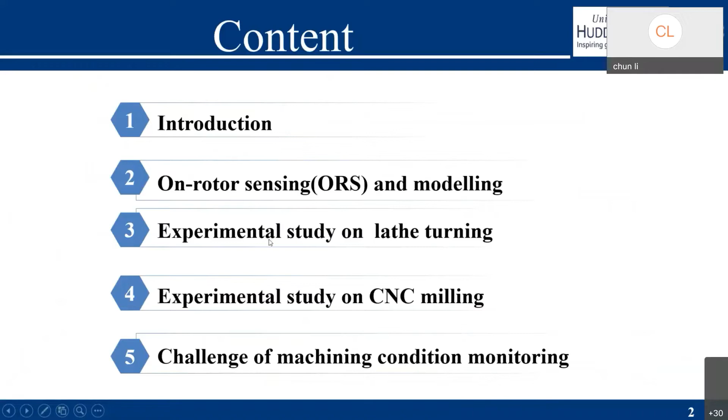Please. Okay, thank you. I'm Chun Li. I'm from China. Today, my topic is about machining condition monitoring based on vibration data from on-rotor sensing. I will introduce my content in 5 parts. Firstly is the introduction. As we know, machining is very important in our manufacturing, and it's reported 70 to 80% of the parts are formed by cutting, such as turning, face cutting, drilling, milling, and so on.

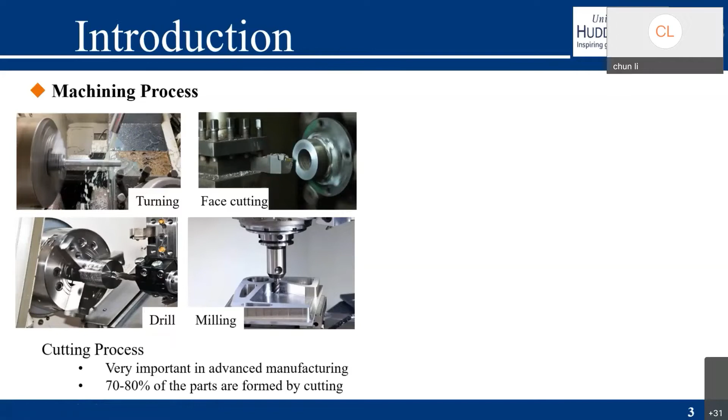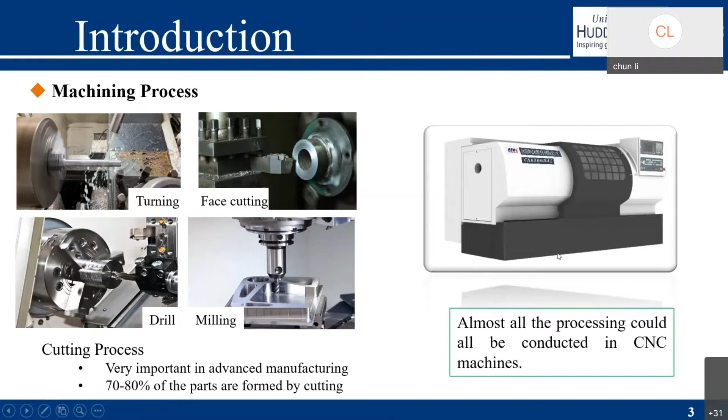With the development of technology, there are more intelligent machines such as CNCs, and almost all the processing could be conducted in the intelligent machines. But condition monitoring is very difficult due to 3 factors: a very complex machining process, various impacting factors, and it's very difficult to install the sensors. This figure shows the geometric errors in the products, and these figures show the changes on the surface of the products. And this shows tool wear or tool breakage. So it's very important to do condition monitoring during the machining process.

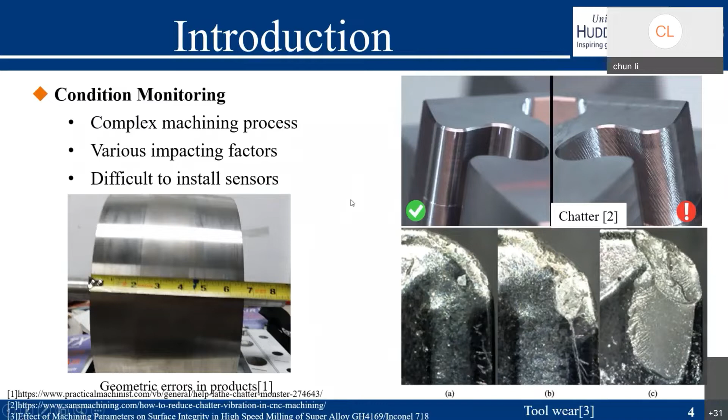As for the machining condition monitoring methods and sensors, it is reported that there are many different methods. The main method is the stability analytic method, and the second is signal-based monitoring. The stability analytic method is mainly about research on the parameter side. When we do the machining process or cutting, we just need to check the stability parameters and work in the stable parts. But even though we use the stability parameters, some uncertainties such as temperature or tool wear will happen, so it will produce unpredictable results.

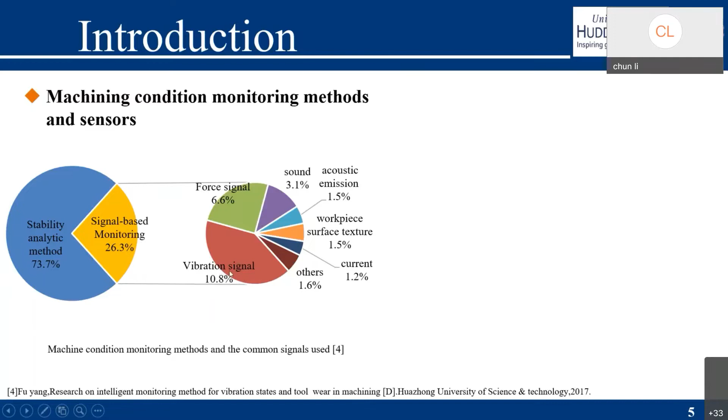In this view, we can see that signal-based monitoring is also very important. So for this report, we just focus on signal-based monitoring. As for this method, we can see that vibration signals occupy the main part, more than 10%. So for my report, I focus on vibration signals. When we need to obtain vibration signals, we need the accelerometer sensor.

And we can see that these sensors need wires to transmit signals or to obtain the power supply. Due to the wires of the sensor, they have to be fixed on the stable parts or some tool holder. But when we need to monitor the quality of the workpiece, these vibration signals are indirect. So we just think maybe we can fix our sensor on the workpiece, but

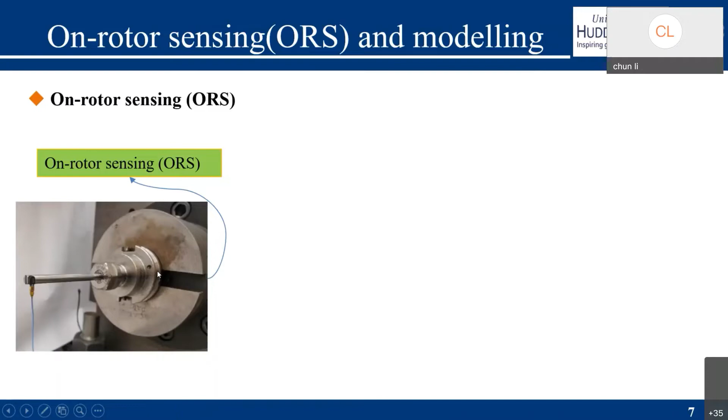Hello. Hello, I think she is offline. Yeah. Dropped the line. Yeah. Just waiting for a second. Can you hear us, Li? Just waiting for a moment. She is reconnecting. Yeah. No issue.

So what's the time now in China right now in Li's place? China. Hello, can you hear me? Hello. Yeah. You can start. Okay, sorry. You can continue. You can once again share your slide. Okay. Can I see my screen? Don't worry. It happens like that. Please go ahead. Yes, it's the poor Wi-Fi.

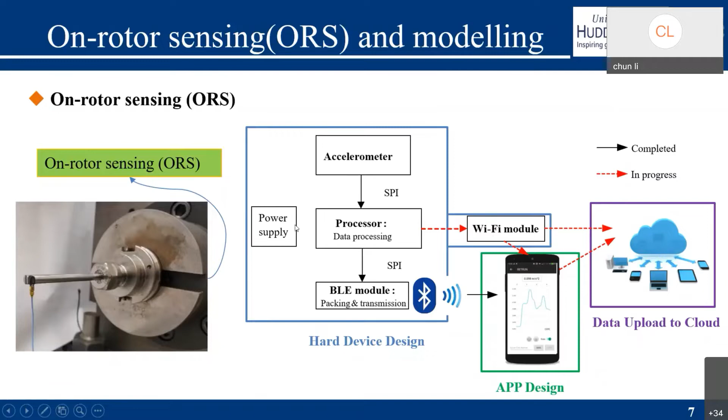So the colleagues in our research center developed the on-rotor sensing, we call it ORS, to obtain the vibration signals. For this ORS, we designed the hard device and the intelligent app. The hard device includes accelerometer, processor, the Bluetooth or Wi-Fi module, and also the power supply. This figure shows the parts of the ORS.

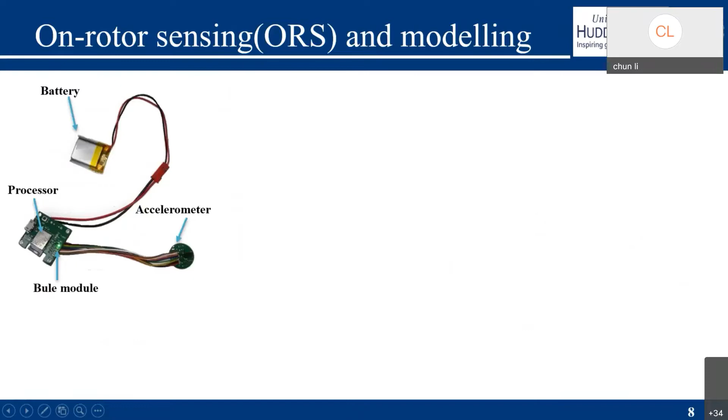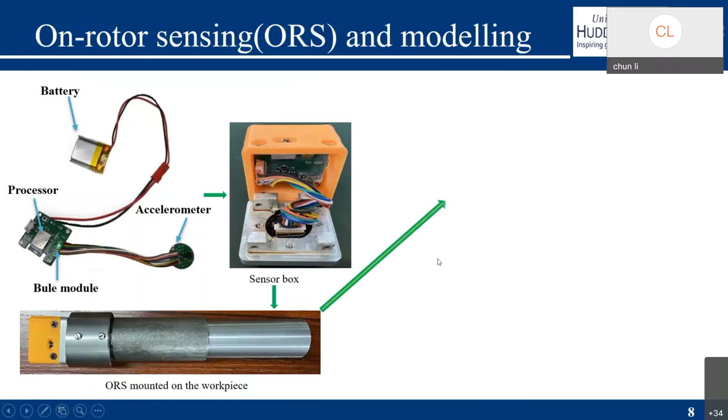When doing the turning experiment, we put these parts in the sensor box and mount it on the end of the workpiece. Then when we do the experiments, we use the ORS to get the vibration signals. This is our first version of the sensor box; the frequency range is 1600 Hertz, and the dynamic range is 16 G.

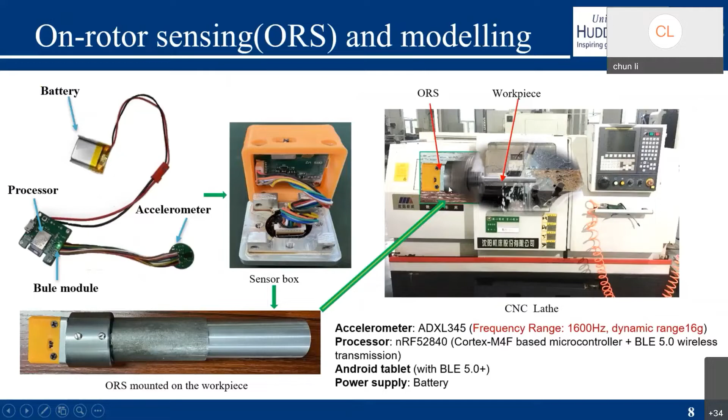When we do the experiments, we find that the dynamic characteristics of the spindle rotor have a big impact on the vibration signals. So firstly, we established the finite element model of the spindle rotor. This is our model. The spindle rotor is mainly supported by two sets of bearings, the rear bearings and the front bearings. I simplify the rear bearings as radial spring support, and the front bearings using radial and axial spring support.

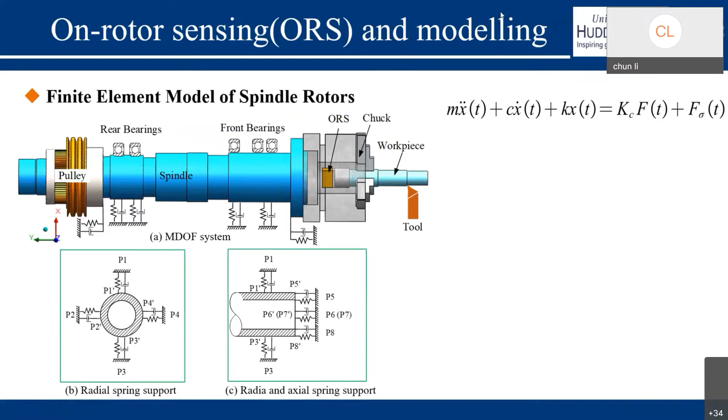Then we can write the simple equation like this one, and F is the periodical total cutting force. Kc is the coefficient related to the workpiece material, heat treatment, cutting angles, and depth of cut. And F sigma is the stochastic cutting force, which can be written like this. The big Gamma represents the Gaussian distributed white noise, and delta, mu, and sigma are mathematical parameters specific to the parameter set; delta is related to the cutting velocity, mu is the chip width, sigma is the rake angle.

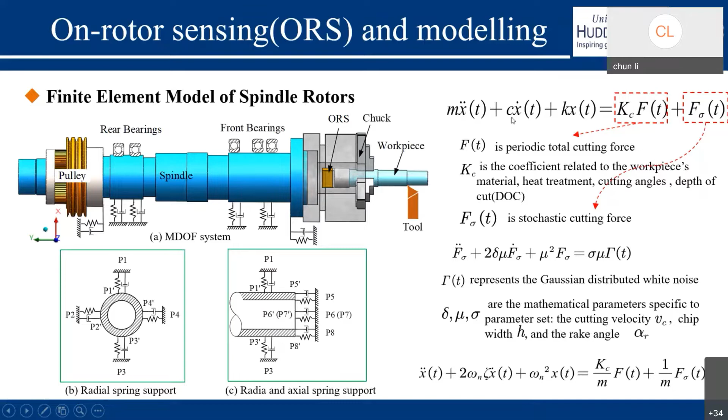So we rewrite the equation like this one, and we can see that this part is related to the tool wear conditions and depth of cut. In this part, we can see that the stochastic cutting force can induce resonance. And this is the mass of the system. So we take these three factors into consideration. Firstly, the mass of the workpiece. We set 4 different masses, mass 1 to mass 4, with increasing mass, and they have different diameters and lengths.

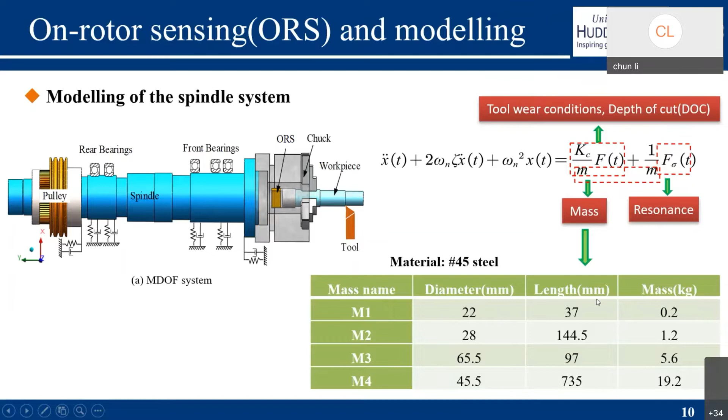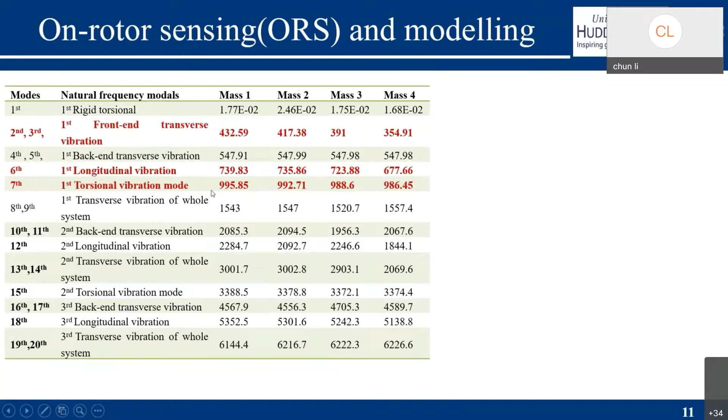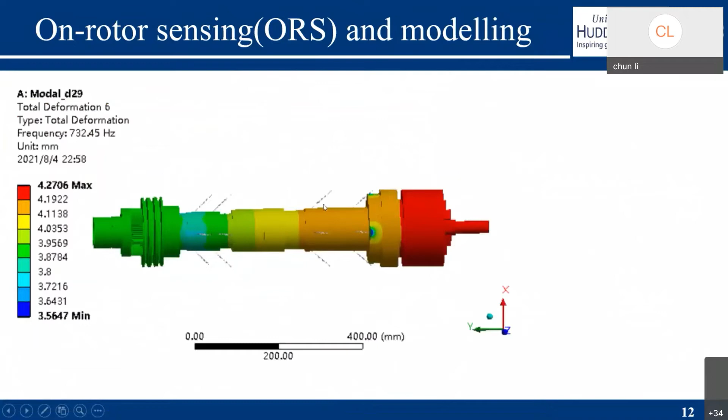We firstly use the FEM model to obtain the natural frequencies and different modes. Because of the frequency band of the ORS, we just focus on frequencies below 1,000. This is mode 3, the front end transverse vibration, and the mass of the workpiece has a big influence on this natural frequency. This is the back end, the belt end of the spindle, the 4th or 5th back end transverse vibration; the mass of the workpiece has little influence on it. The 6th is the longitudinal vibration, and the 7th is the torsional vibration mode.

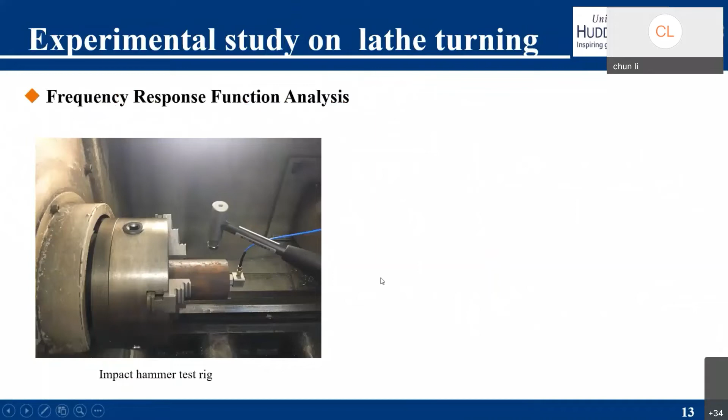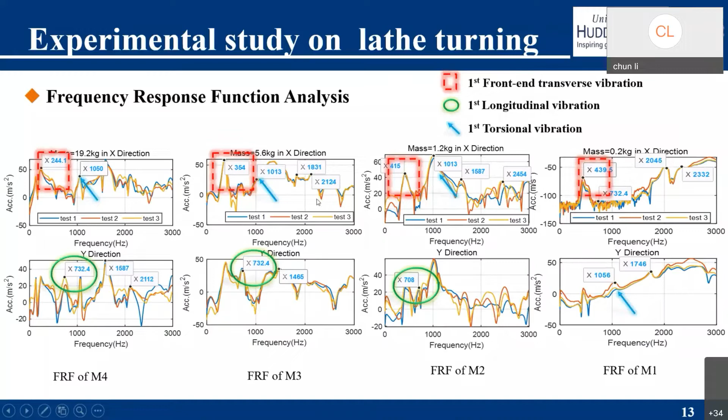To verify the FEM results, we did the impact hammer test and got the FRF results. We can see that even though they have different masses, we can obtain their front end transverse vibration, and it increases with the decrease of the mass of the workpiece. Also, the longitudinal vibration is about 700 Hertz, and the torsional vibration is about 1,000 Hertz.

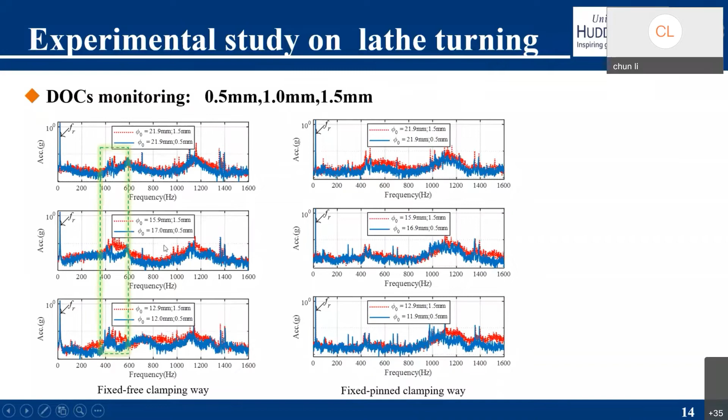Based on this analysis, in the experiment we set different DOC: 0.5, 1.0, and 1.5. We also have two clamping ways, the fixed free clamping and the fixed pinned clamping. For both, we can see two resonance frequency bands, consistent with the impact test and the FEM results. Also from this figure, we can see that the greater the DOC, such as the red representing DOC 1.5, and the blue one representing 0.5.

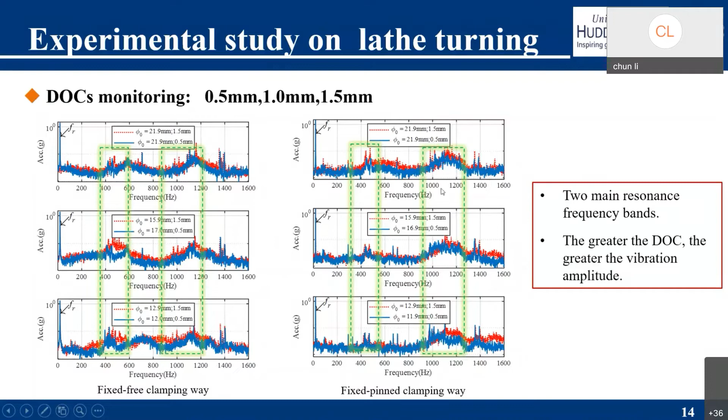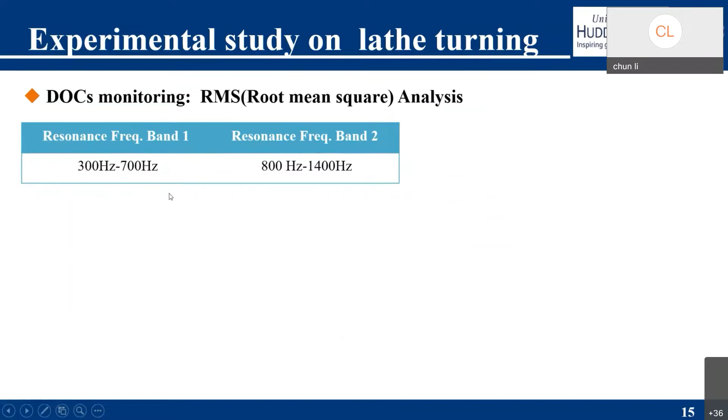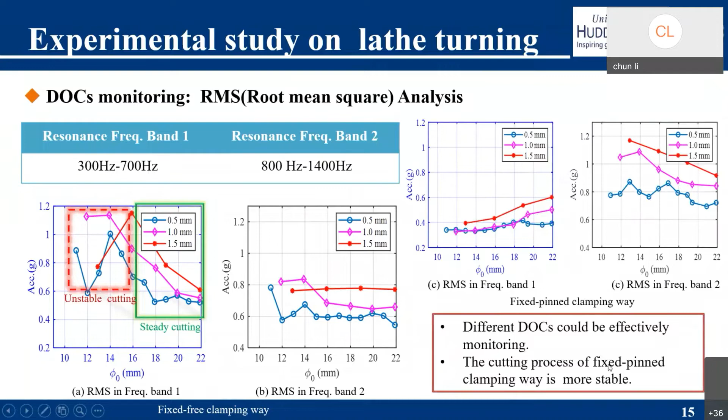So later on, we just use the two different frequency band filters to get the filtered data, and we just calculate the RMS after the two band filters and get the result. We can see that the different DOC can be effectively separated, and also the fixed pinned clamping way is more stable.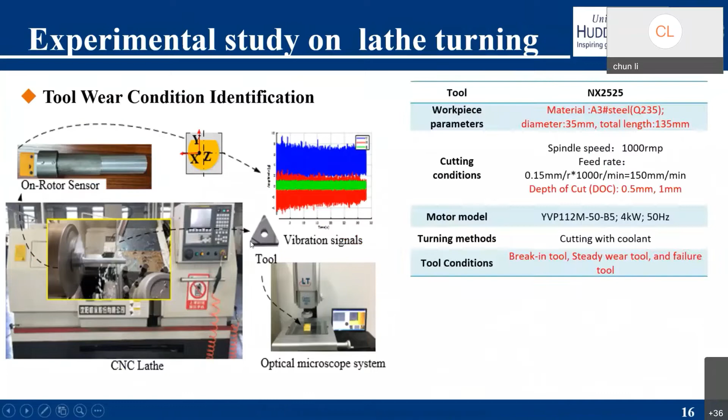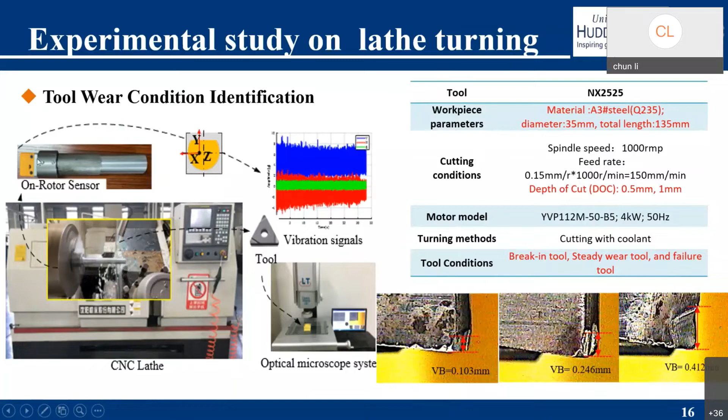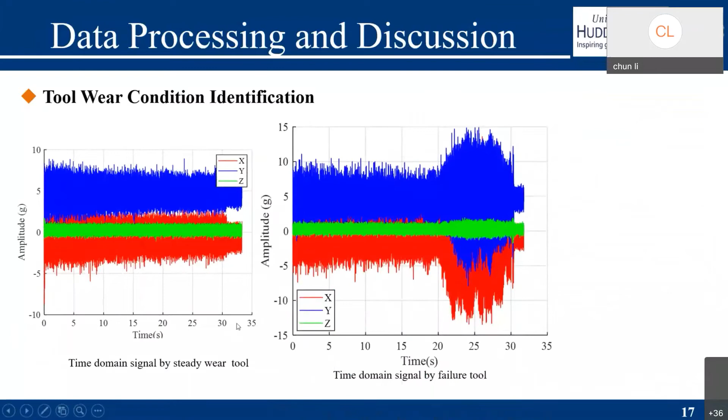The second experiment is about the tool wear condition identification. There are three different tool wear conditions. We call these break-in tool, steady wear tool, and failure tool. Also, I use the on-rotor sensor to get the vibration signals. This is our raw time domain signal and frequency domain signal, and we can see that this is the signal for the failure tool.

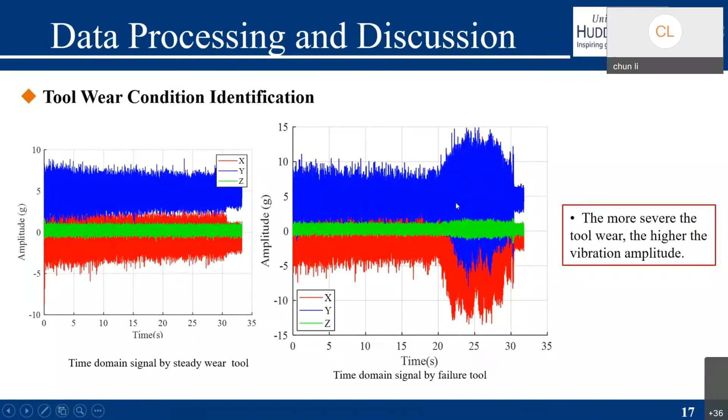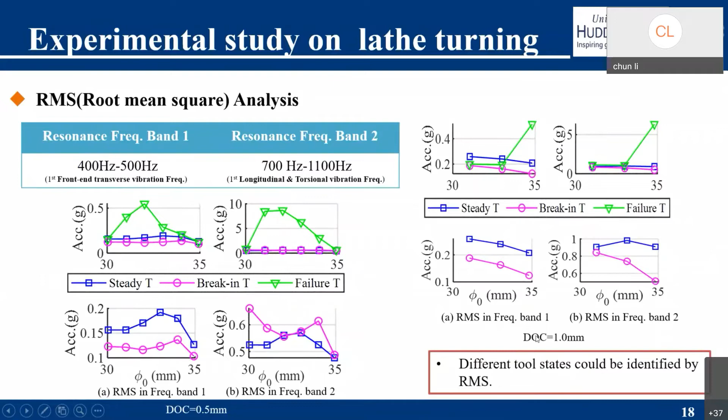We can simply see from these time domain signals that the greater the tool wear, the higher the vibration amplitude. Then we use the same method and calculate their RMS, and we can separate or identify the different tool conditions. We also know that with the decrease of the mass, the natural frequency of the model increases. So for the second method, I just calculate the spectral centroid, and we also get a good result.

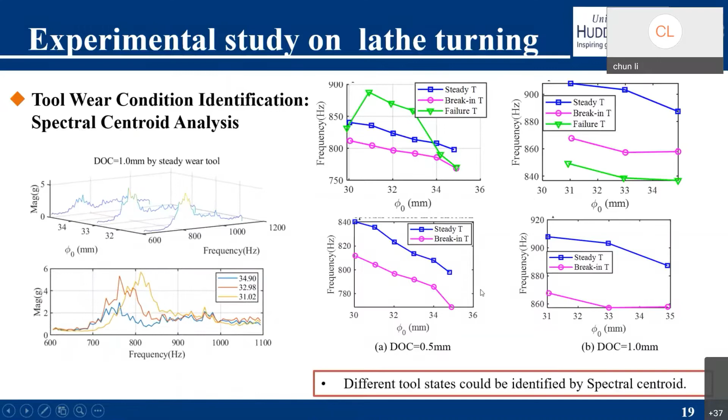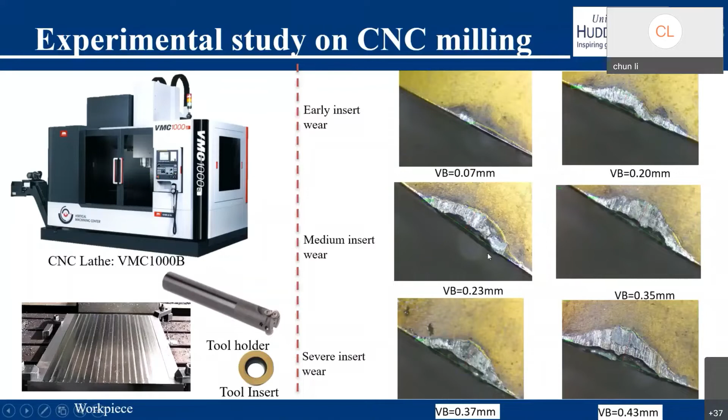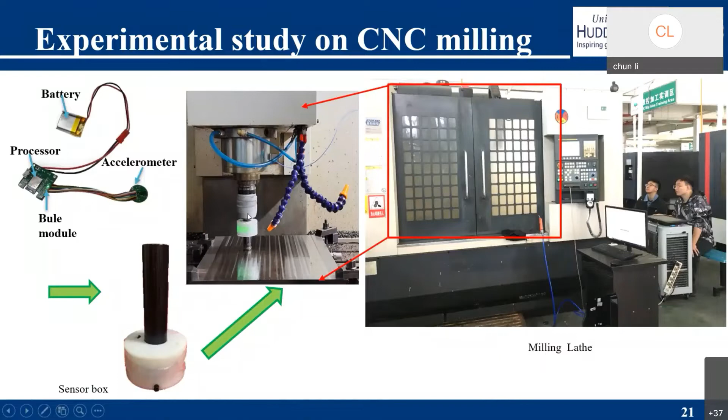Finally, there is the experiment we conducted on the CNC lathe recently. This is our tool insert, and we mill the workpiece until the tool insert fails. These are some figures about different tool states over time. This is our second version of the sensor box, mounted on the tool holder and rotating with the spindle. With the same method, we could also get some results.

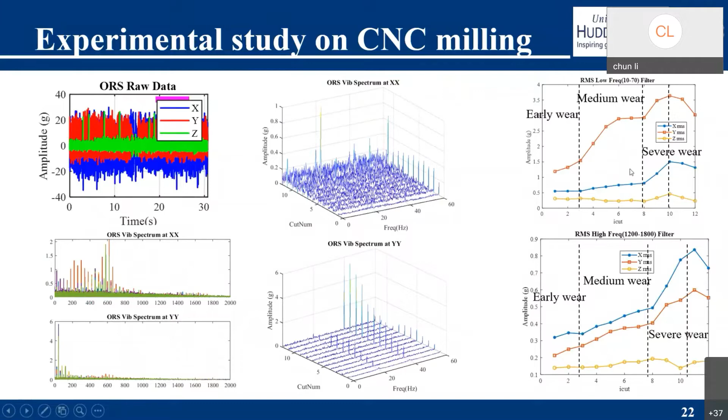Okay, finally, it's about some challenges I faced when I did the experiments. Firstly, various parameters affect the machining process and the characteristics of the vibration data. Second is the nonlinear and unsteady relationship between the cutting parameters and the signal source. It is very difficult to establish an accurate model. Finally, the inhomogeneity of workpiece materials and the nonlinearity of the system parameters result in uncontrollable and unpredictable results. Okay, that's all.

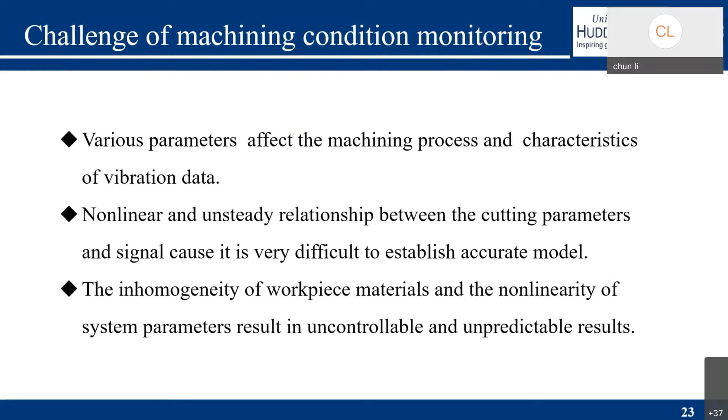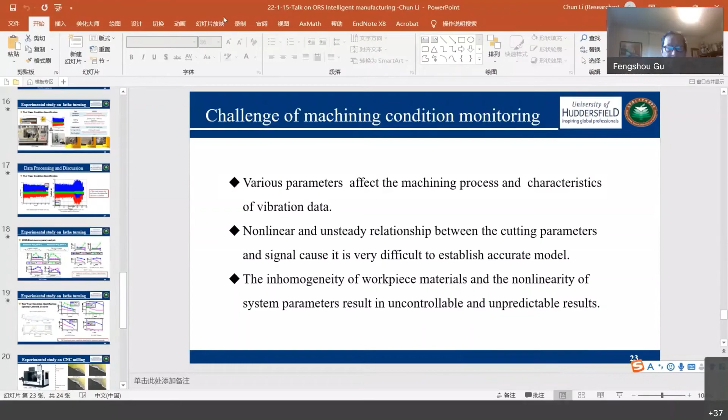Okay, thank you, Chun Li, for presenting your work to everybody. Sajja, would you like to make some general discussion of this work? Anybody? Then we go to the next one. What I would suggest is that you go ahead with your presentation first, and then at the end we can have the discussions. Okay, that's good. So, Zhexiang, you present yours first. Okay. I can't share my screen. We'll give you access. Ananta, could you please give her access? Yes, sir. It is given. Thank you. Can you see my screen? Yes. You can go to presentation mode. Yeah, that's right. Brilliant. Please go ahead.

Okay, thank you. Hi, everyone. My name is Zhexiang Zou, and my report today is instantaneous electrical signal analysis for online monitoring of machining operations. This is my report outline. It's divided into 5 parts. The first one is introduction and motivation.

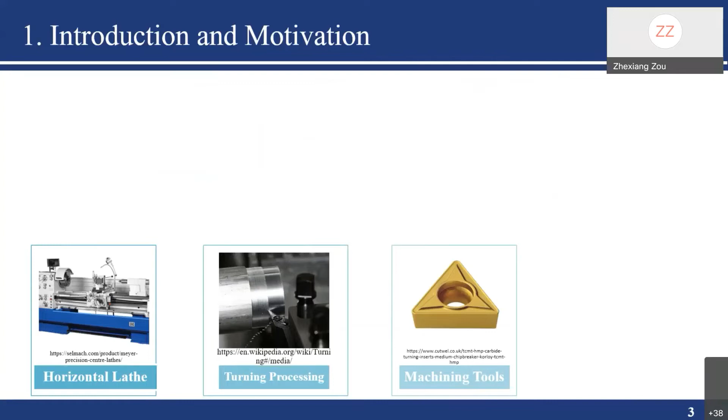The term machining describes a variety of material removal processes, including turning, milling, and drilling. A cutting tool removes unwanted material from the workpiece in the form of chips to produce a desired shape. Machining operation monitoring tasks include detecting cutting and machine tool condition, checking and maintaining process stability, avoiding machine damage, and maintaining machining tolerance. As shown in the figure, many objects can be monitored. The workpiece and the tool are the main factors to ensure optimum performance of the complete system.

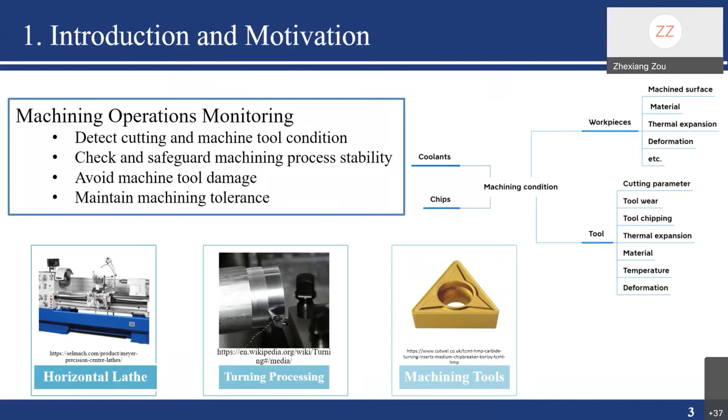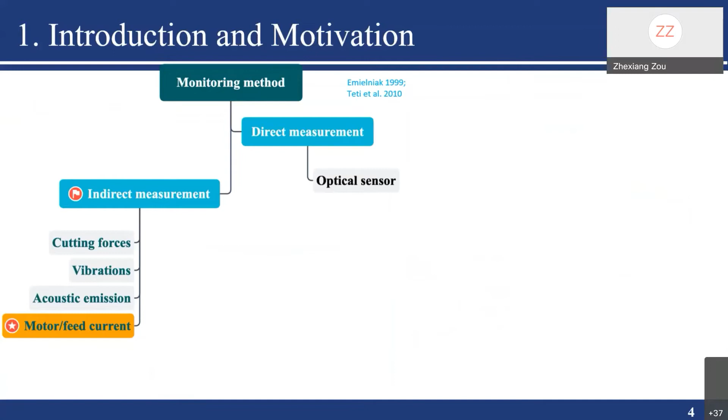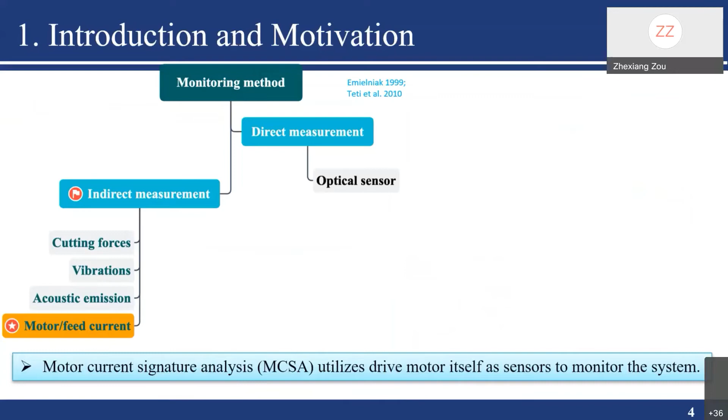Sensors are needed for in-process monitoring and feedback to controllers. According to the sensor, monitoring methods can be divided into indirect measurement and direct measurement. Compared to other tools, motor current signature analysis, MCSA, uses the actual motor as a sensor to detect problems in the system. It is non-intrusive and cost-effective, so it is widely accepted as a valuable tool. In the literature survey, there is no clear mapping relationship between the current signals and machining parameters, tool wear process, and surface quality.

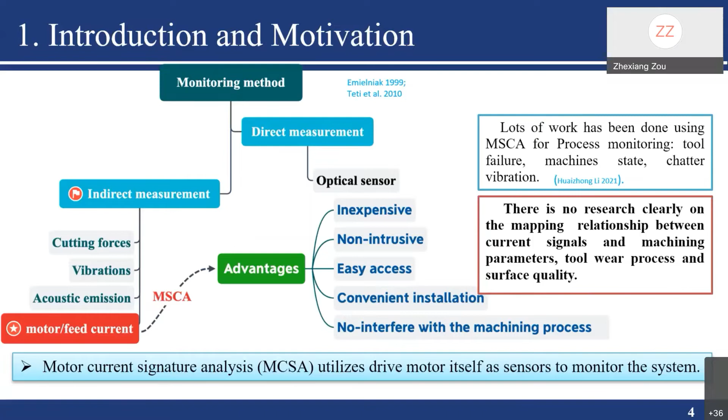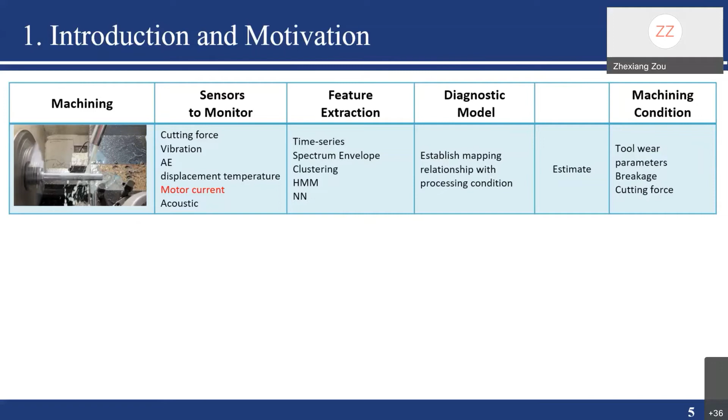So you can see this is the framework of the research process. As a result of the nonlinear coupling of the system, we have to describe and quantify the uncertainty in the monitoring signal. Moreover, I need to consider the impact of degraded performance in the motor sensor system. So I must develop more effective signal analysis methods to deal with weak fault signals and strong background noise. So my main research content is to develop an accurate physical model and advanced data analysis techniques so that we can identify tool wear, machining health condition, and workpiece quality.

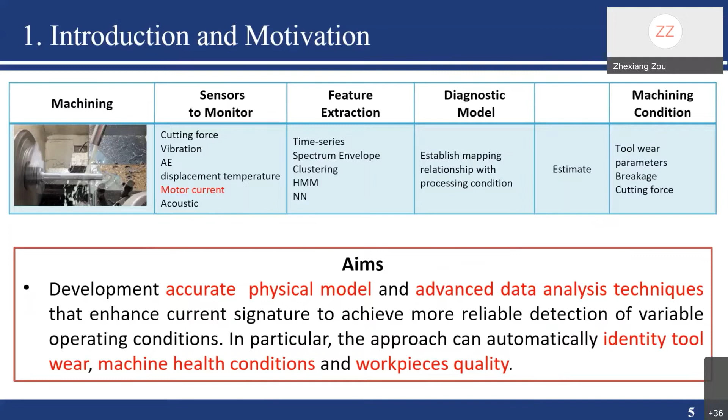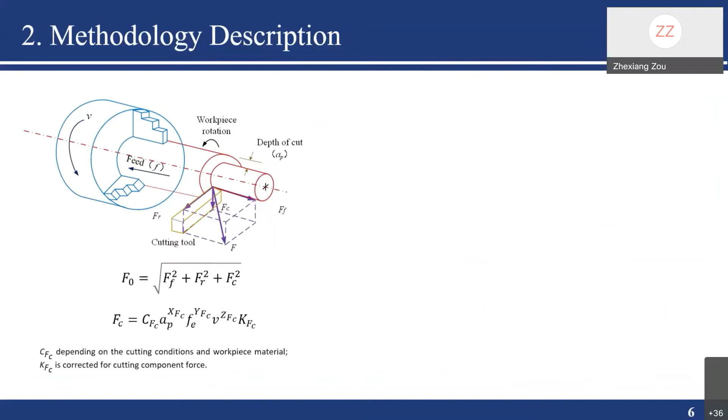As we know, when material is removed, cutting force is produced between the cutting tool and the workpiece. But changes in operating conditions are not reflected in static cutting force. So, if there are material problems present in the load, torque and speed oscillations will occur and lead to additional frequencies in the spectrum. A good way to obtain machining information is to examine the relevant frequency sidebands.

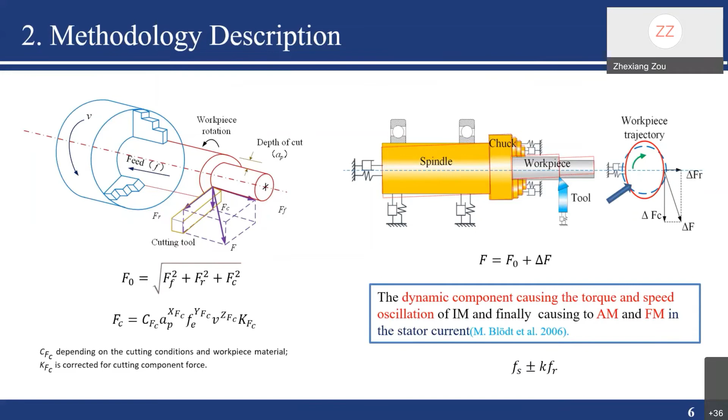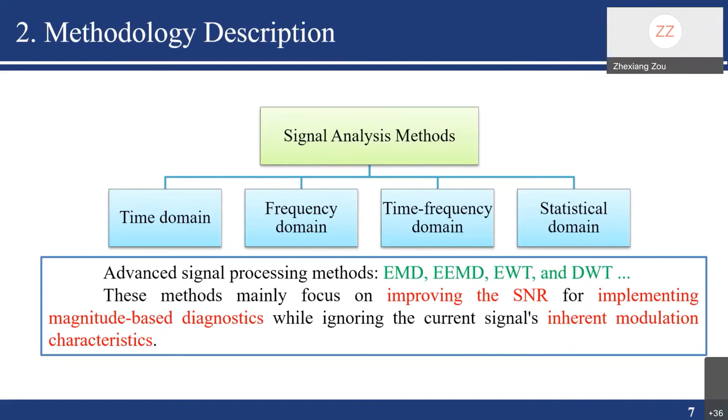We know signal analysis includes the time domain, frequency domain, time-frequency domain, and statistical domain. For example, the wavelet transform and its derivations are widely used to process signals for feature extraction to reflect machining vibrations. But those methods do not account for the modulation characteristics of the system signals.

So I chose the MSB. MSB, the modulation signal bispectrum, significantly enhances complicated modulation components. Theory and experiments have shown that MSB analysis can produce outstanding results in detecting and diagnosing early faults of rotating machines. Although there are extensive applications in different fields, there is no report on MSB being used in machining state monitoring and fault diagnosis.

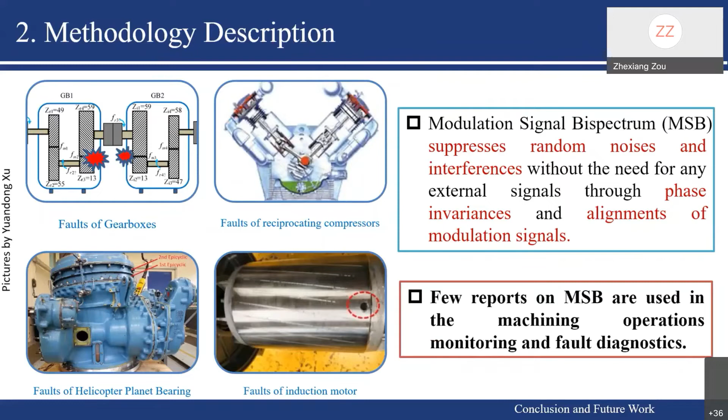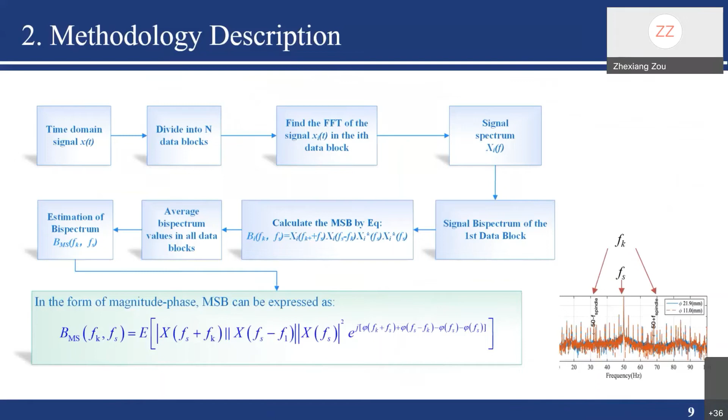To verify the effectiveness of MSB applied to motor current signals from the process, I carried out a numerical simulation analysis using an AC motor model developed based on the lathe model. By applying multiple harmonics to the electrical equation, the amplitude and the phase of the modulation sidebands are extracted according to the previous formula and presented. It shows that the phase is more sensitive to changes in both static load and dynamic oscillation that appear in typical machining processes.

And for the case of the BRB, broken rotor bar, and the motor shaft electrical problem, both phase and amplitude show significant change. So it also can be used to detect BRB and electrical problems.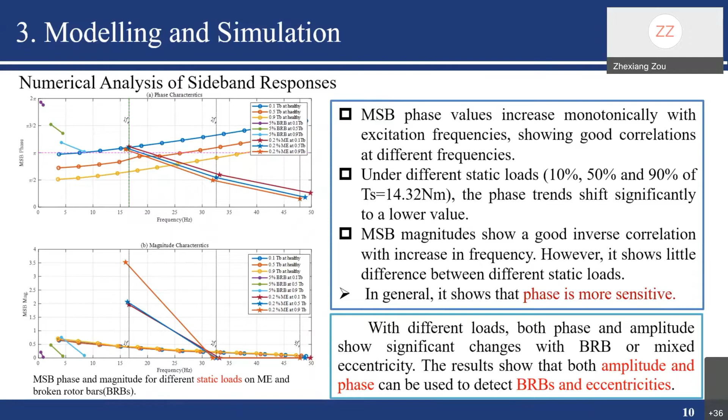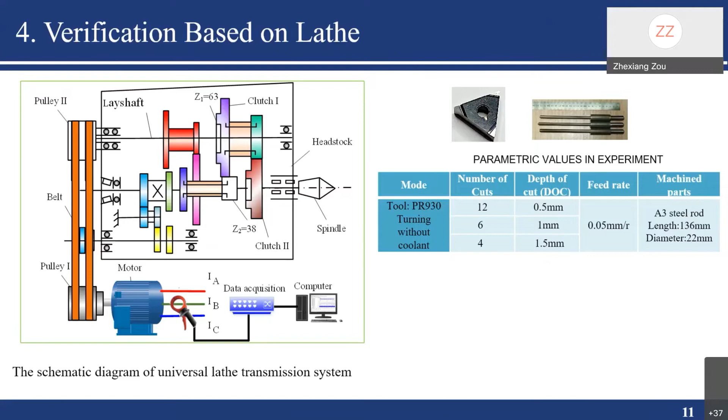So we performed experiments based on turning a shaft-like workpiece on a universal lathe to verify the analysis. The figure shows the power transmission system of the lathe, which is powered by a three-phase induction motor, and a current clamp measures the motor current. We use different DOC to study the difference. You can see this is the characteristic frequency of this system.

This figure compares two signals of the same turning workpiece with two different depths of cut. We found it difficult to decide which is which. MSB magnitude results are most evident at the 50 Hz slice of the MSB. So this method reduced both redundant sidebands and random noise significantly. You can find the rotation frequency of the motor shaft, the spindle and others. Using stator current information, the moving parts of the transmission system can be evaluated.

So we examined the... Sorry to interrupt you. Zhexiang, can you move your cursor around so that people can follow you better? Can you show your cursor? Cursor? Yeah, mouse cursor. Mouse. Yeah, cursors. 你那个光标。 Okay.

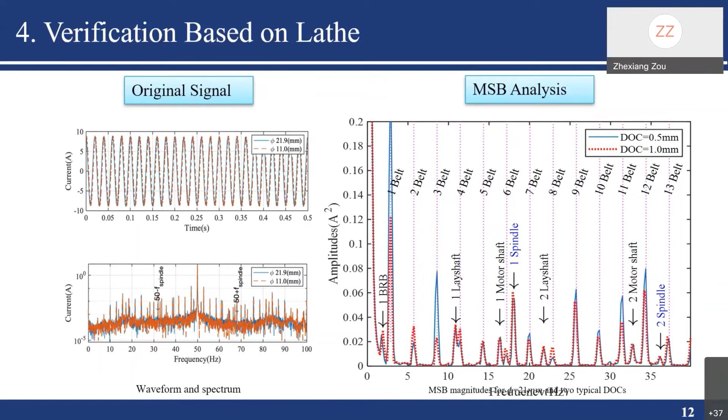You can find the rotation frequency of each moving part along with its harmonics. In the figure, the spindle, motor, and the lay shaft. You can see the MSB peaks. So we found using stator current information, the moving parts of the transmission system can be evaluated. So we examine the change. It is possible to monitor the turning process.

As shown in the figure, the monitoring results are based on MSB magnitude. MSB magnitudes are highly fractured and unable to differentiate across turning conditions. The following figure shows monitoring results based on MSB phase. The key frequencies are all completely separated apart from the motor frequency.

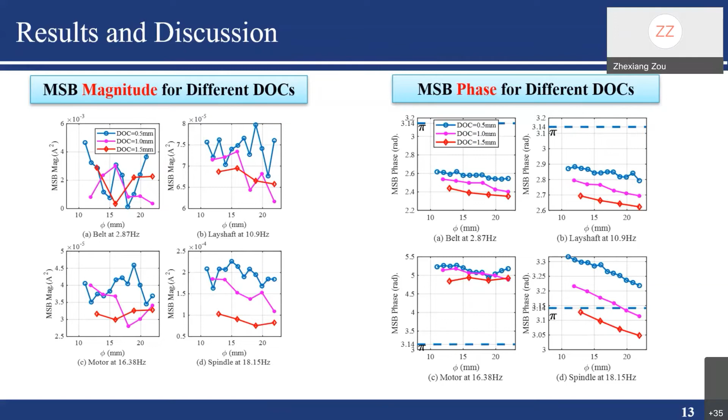This result is consistent with the simulation that the magnitude is less sensitive to variation in static load and dynamic oscillation. The phase is extremely sensitive to turning parameters such as depth of cut and the diameter of the workpiece, considering that they represent the combined effect of dynamic loads. They are usually indicators of manufacturing quality.

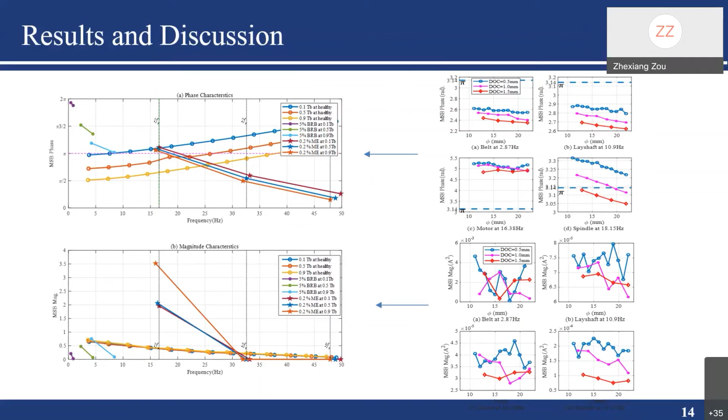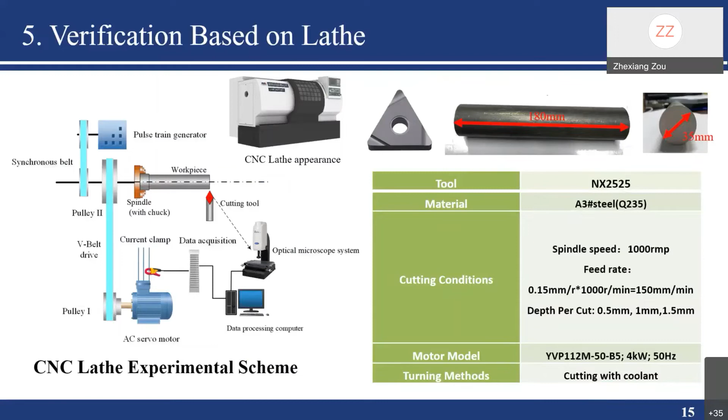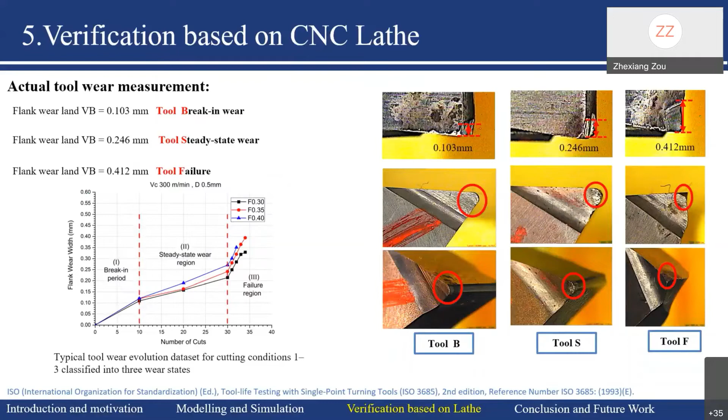You can see in this figure, I built another experimental test system on a CNC lathe in order to examine the effectiveness of the MSB method for tool wear and monitoring machining parameters. During the process, three tools with varied degrees of wear, break-in wear, steady wear, and tool failure, are used, and we collected electrical signals for analysis. During rough machining, DOC equaled 1.0 mm. The phase is more sensitive to the change of machining parameters, which can be used to identify machining parameter changes.

Monitoring the finishing result is not ideal. For the finishing result, for example, the depth of cut equaled 0.5 mm. So we should improve the algorithm going forward.

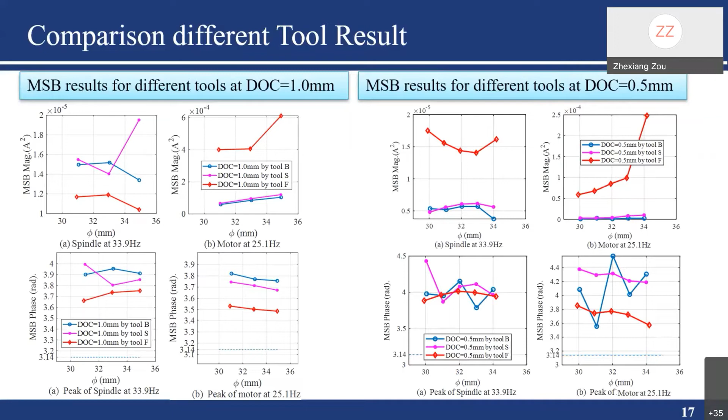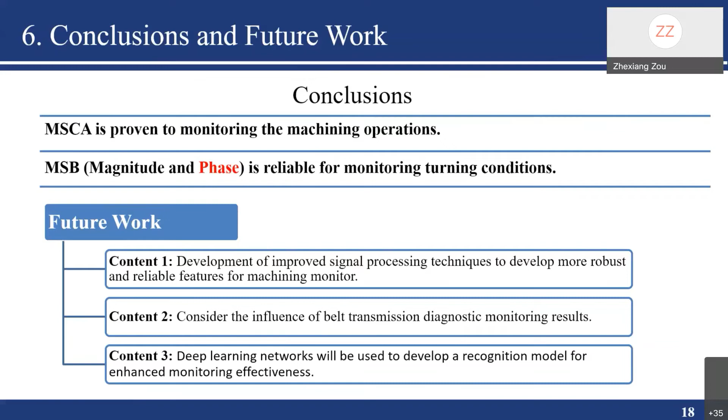Since a lot of doctoral scholars are on this platform listening, I'm pretty sure they will have some questions. But before I move on to them, I do have some queries.

Lee, you have worked on vibration-based condition monitoring. It's a wonderful work that you have done, and you have rightly said that vibration is one of the important sensors that can gather useful information out of the machining process.

You have mounted the accelerometer onto the tool post, and in one case you have shown the accelerometer mounted onto the tool spindle. Now, I'm asking this from the real-time feedback and control purpose: when you are transmitting the data, how fast are you transmitting it to the cloud?